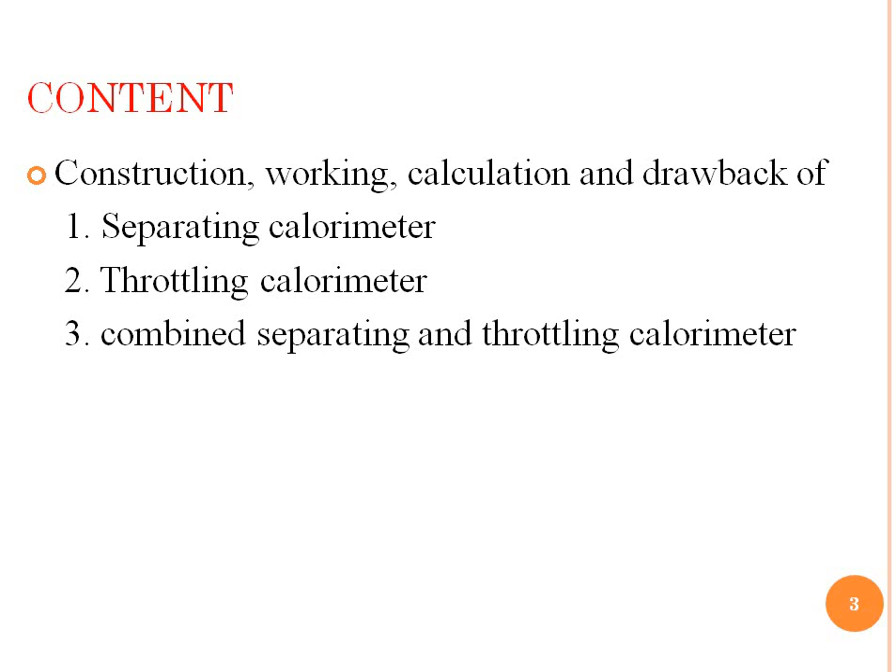Now, as the name suggests, the first is a separating calorimeter which works on the separating principle. The throttling calorimeter works on the throttling principle, and the last one works by combining the advantages of both calorimeters. Let us check out the separating calorimeter. The separating calorimeter is the second type of calorimeter. The first one was the bucket calorimeter.

This is its construction. You can see there are around 10 components listed on the right hand side of this slide. Starting with number 1, here it's a control valve. As we open it, through number 2, which is the main steam pipe, wet steam will enter into number 3, that's a sampling tube. As wet steam enters the sampling tube, it passes from its second end and strikes component number 4, which is a perforated tray. The perforated tray is a very important component for the separation principle.

Once it strikes component number 4, this red arrow indicates that moisture particles will go down inside component number 5, the inner chamber, and the remaining dry steam, which has lesser density compared to the wet particles, will go toward the top side and pass through the space between the inner chamber and outer chamber, which is component number 6.

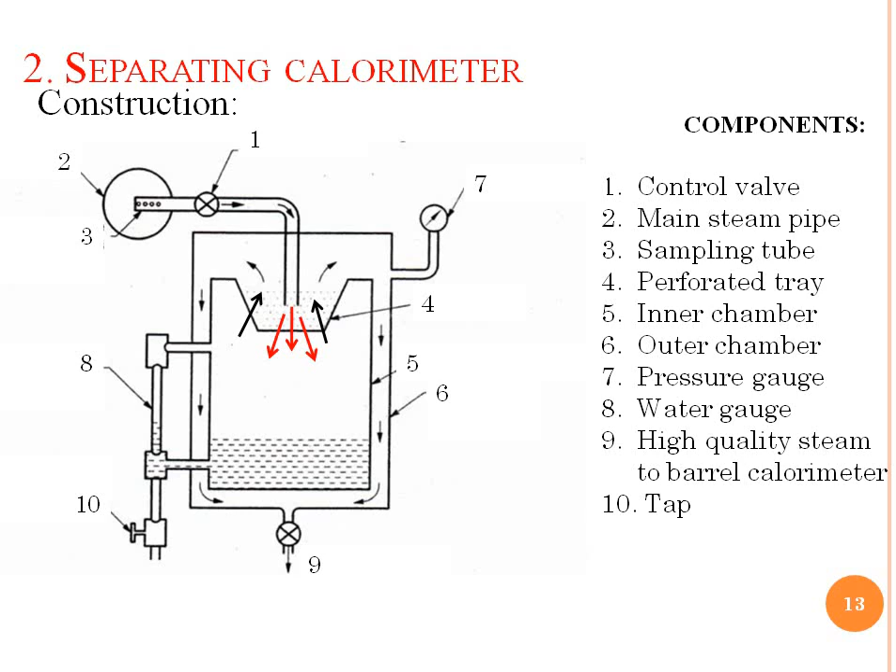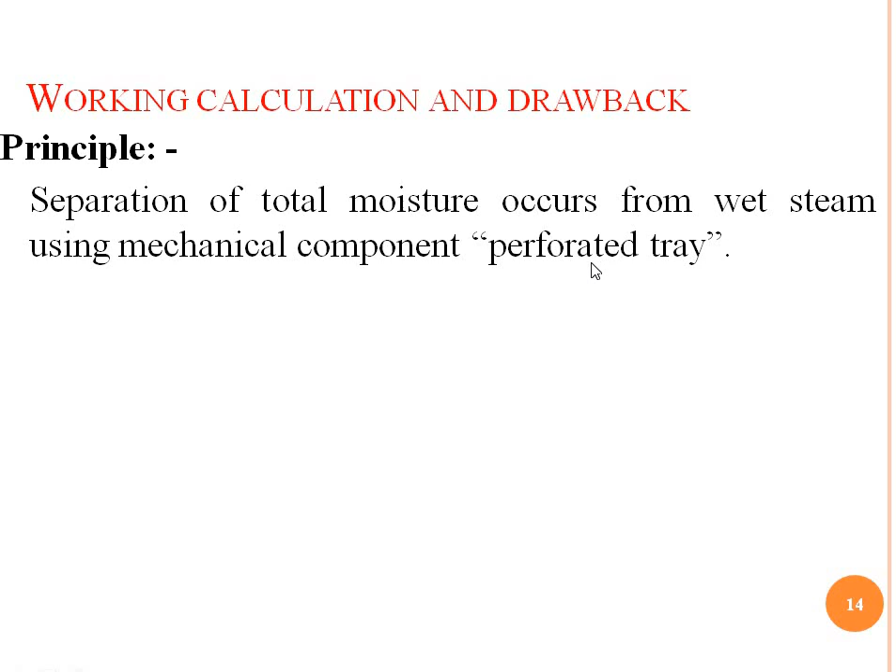I have already explained the simple working through this figure. Now let me explain the principle. Its principle, as I told you, is based on the separation process, and it is mechanical separation. Separation is achieved using a perforated tray, which is the main component, and we assume that all moisture will be removed using this tray, and just dry steam will go outside.

After sampling this steam, we have to measure the mass of water separated into the inner chamber, say MW in kilogram. To find this, we use density into volume. The volume of water stored inside the inner vessel is the area of the inner vessel multiplied by the height of water in the water gauge, and we multiply this volume with the density, which can be found from the steam table at the corresponding pressure of the pressure gauge.

Next, number 2 is the mass of steam condensed in the bucket calorimeter, that is MS. After completing the separation process, dry steam goes to the bucket calorimeter where it gets condensed, and we measure the mass of this condensed steam, MS kilogram. So the dryness fraction is the ratio of MS, mass of dry steam, divided by total mass of wet steam, MS plus MW. So the calculation is very simple.

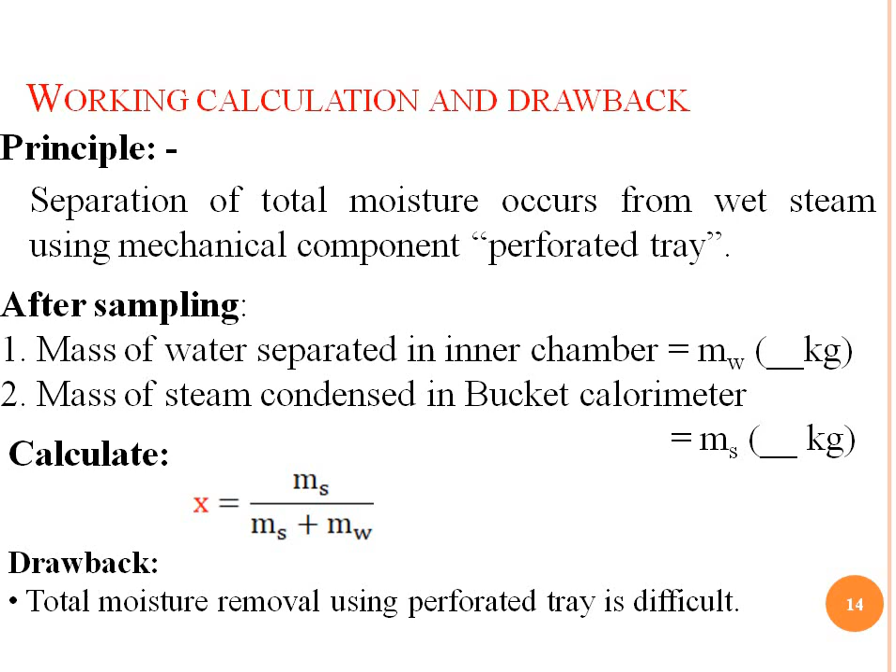And the main single drawback is that we cannot completely remove the moisture particles from wet steam using a perforated tray. It is difficult. Number 3 is the throttling calorimeter. Here, look at its construction.

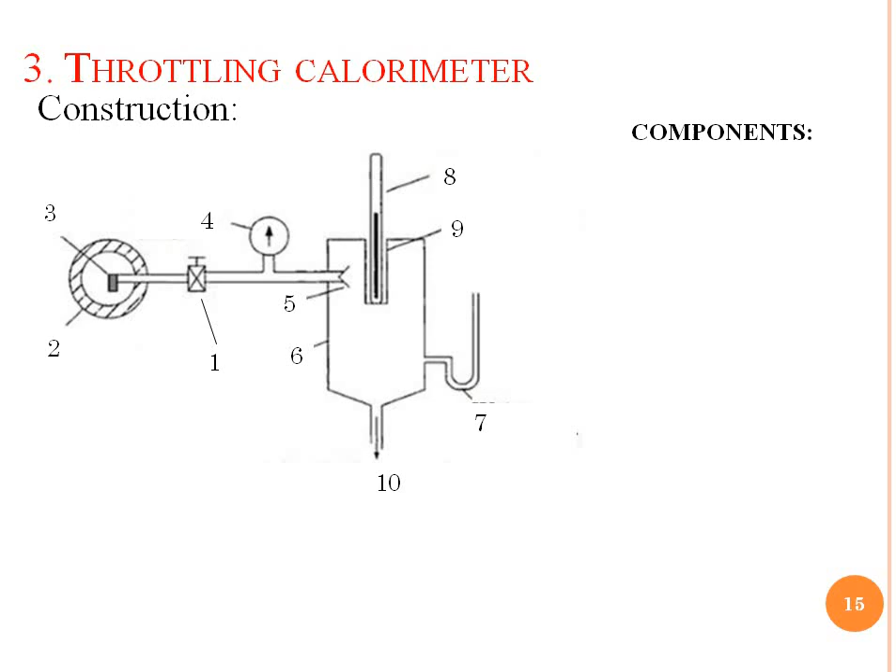Again, there are around 10 components: number 1, a control valve, number 2, the main steam pipe, number 3, a sampling tube, number 4, a pressure gauge, number 5, the throttling orifice or throttling valve, number 6, the throttling chamber or throttling calorimeter, number 7, the U-tube manometer, number 8, a thermometer, number 9, a thermometer pocket, and number 10, superheated steam going to the barrel calorimeter. How they are arranged you have already seen.

Let us check out the principle of working. It works on the throttling principle. Between section 1 and section 2 we have component 5, which is a throttling orifice or throttling valve. As steam passes through this throttling valve, the throttling process occurs.

And during this throttling process, as we know, enthalpy will remain constant. So H1 will be H2, initial enthalpy will be final enthalpy, but there will be a change. Right? What is that change? Initially steam should be wet, and after throttling steam should be superheated. This is the main thing which we have to achieve in this throttling calorimeter.

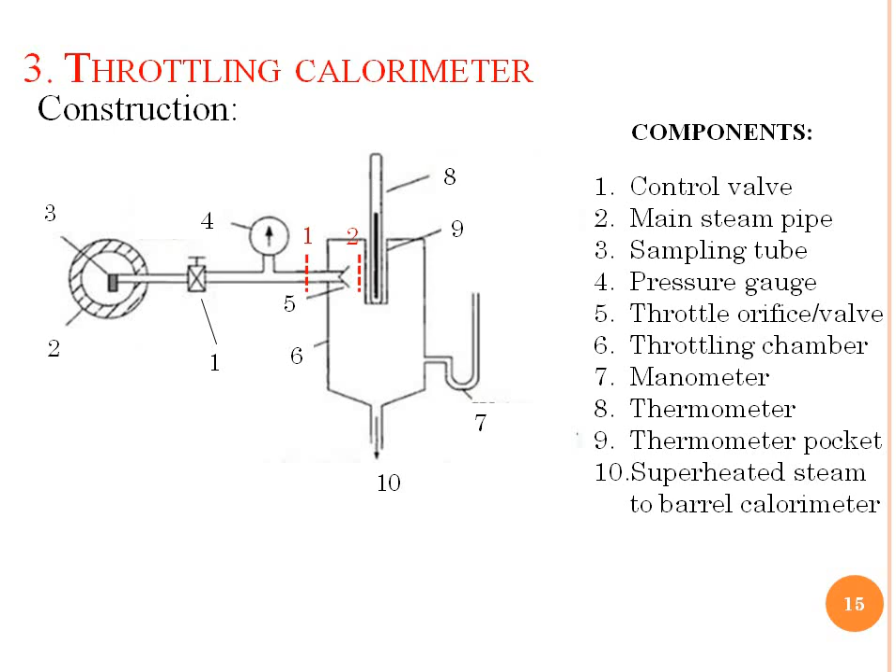By this throttle valve, component number 5, the main component, steam will be converted from wet steam to superheated steam due to the throttling process, and the superheated steam will pass directly into this throttle chamber, component number 6. We will measure its pressure using manometer number 7. Number 8 is a temperature measuring device, thermometer. Number 9 is a thermometer pocket, and at number 10 finally the superheated steam will go to the barrel calorimeter.

Working principle and calculation. Working principle is already explained, throttling process. So enthalpy before and enthalpy after will remain the same. Initially wet steam enthalpy, finally superheated steam enthalpy. How to calculate these enthalpies? For that you require basic knowledge of the equation. What is H wet steam? That is hf1 plus x hfg1.

And what is H superheated steam? It is hg2, meaning dry steam at state number 2, plus Cp of superheated steam multiplied with delta T, superheated temperature minus temperature of saturated steam at the second state. Through this we can find the dryness fraction x by this final simplified formula: hg2 plus Cps into (T sup minus T sat) minus hf1, divided by hfg1. Remember, this T sup minus T sat is also called degree of superheat.

And you can see the same process on this left hand side h-s curve. We also call it the Mollier diagram, in which you can see state number 1 indicating wet steam and state number 2 indicating superheated steam. Between these there will be a dry steam state, but we have not marked it here. And the pressure is dropped. You can see during this throttling process initially pressure was P1, but finally pressure is P2. So this is the actual working explained using the Mollier diagram.

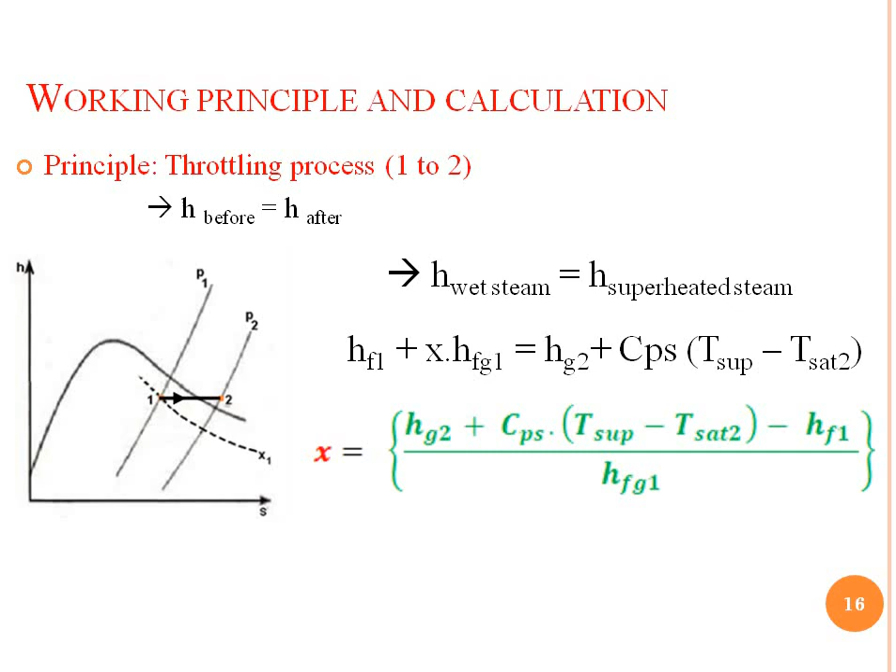And what are the drawbacks of this method? Steam must be superheated after throttling. Otherwise, we cannot apply this formula of superheated steam and our answer can be wrong. And second, steam before throttling should be of high quality. Otherwise, again, we will not be able to achieve superheated steam after throttling, or we will have to throttle it to very low pressure.

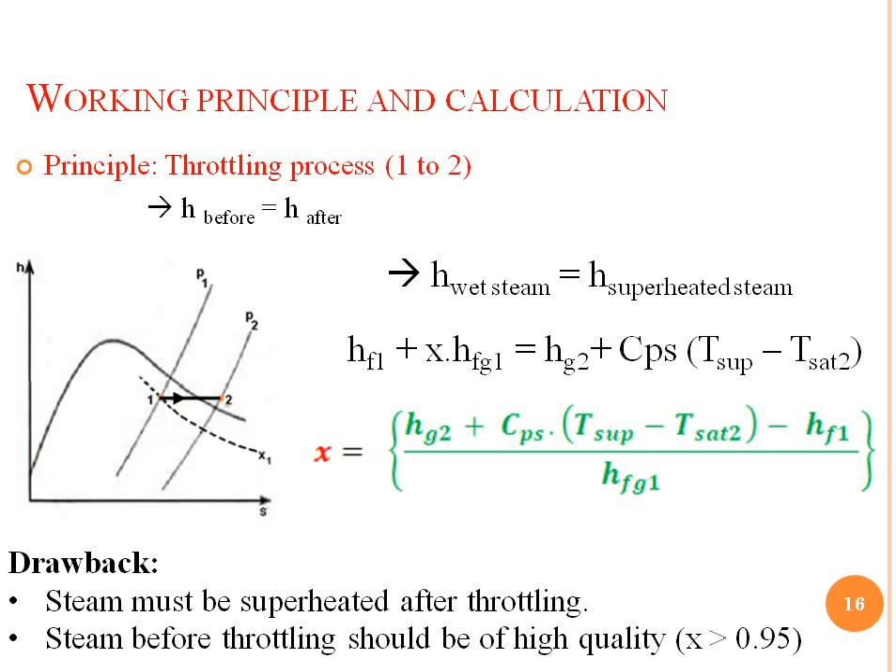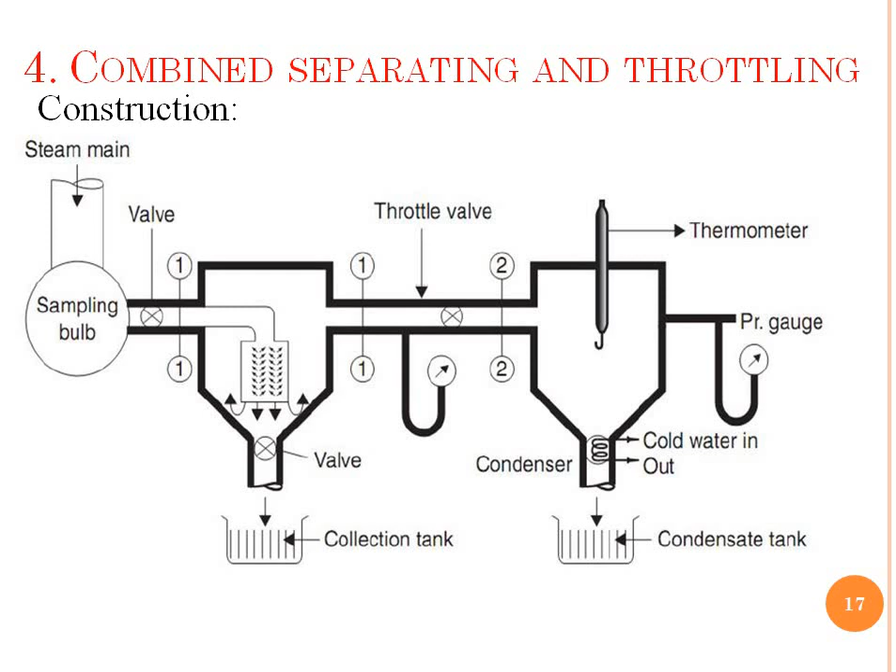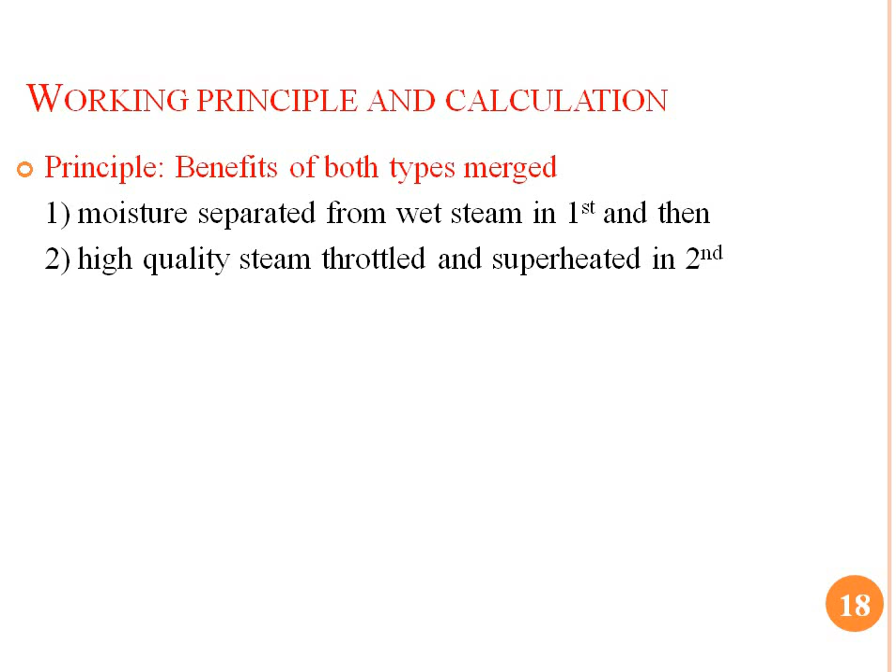Other components are almost similar. So the working principle is the benefit of both types merged, drawbacks are removed. So there is no drawback. Moisture is separated in the first calorimeter from the wet steam, and the high quality steam is throttled in the second calorimeter and converted into superheated. So initially, before entering the first calorimeter, the dryness fraction is x. So the moisture is 1 minus x, the wetness fraction, multiplied with Ms plus Mw, total mass of steam. That will give you the initial moisture available inside the wet steam.

And this moisture is going to be separated by the two calorimeters: first the separating calorimeter, and second the throttling calorimeter. So we can write down that (1 minus x) into (Ms plus Mw) kg of moisture will be removed. That is equal to (1 minus x1) into (Ms plus Mw) removed in the first one, plus (1 minus x2) into Ms removed in the second one. So from this we can find out the general equation.

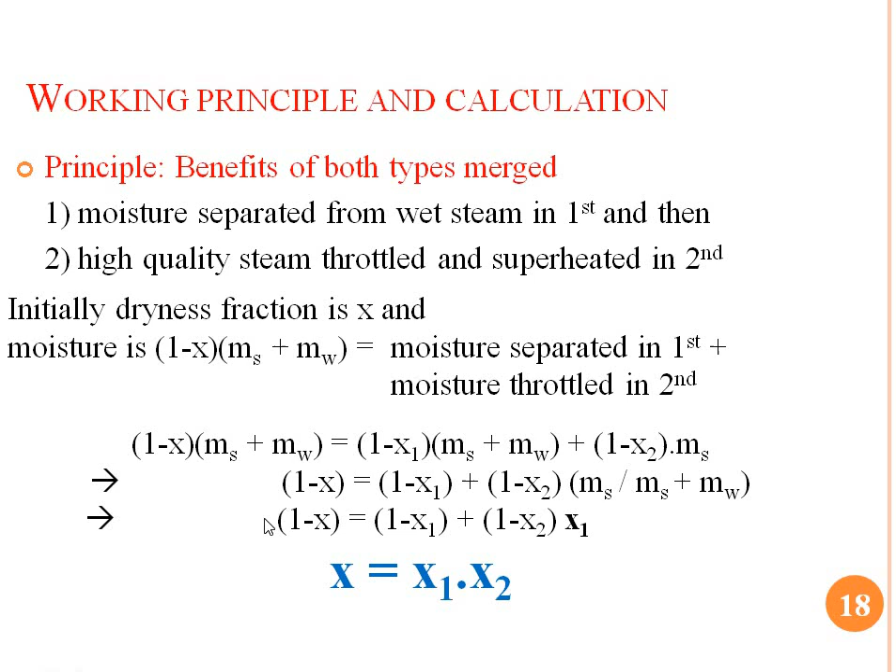By doing the simplification we get the final equation, that is x is equal to x1 into x2, where x1 is the dryness fraction measured using the separating calorimeter and x2 is the dryness fraction measured using the throttling calorimeter. So the final x depends on both of them. It is the multiplication of x1 into x2.